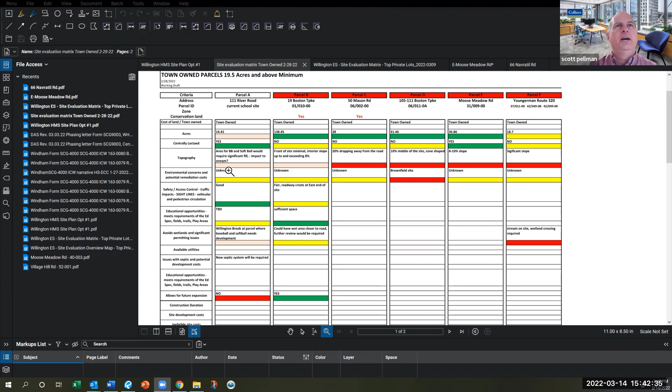So last meeting, what I've done since, in working with Phil, is I've taken a deeper dive on Parcel A. At this point we don't have a full ALTA/ACSM survey, anything really at exact scale that I can use, but I was able to interpolate off the town GIS sites. And so I've created the following concept for the existing Hall Memorial School site.

Again, just to orient yourself, this is Route 32. The existing fields are here. Actually there's a small building, I think a little storage building, right on the property lines. This existing parcel actually goes down quite a bit - again, don't really have the grading. There is also a stream in this location.

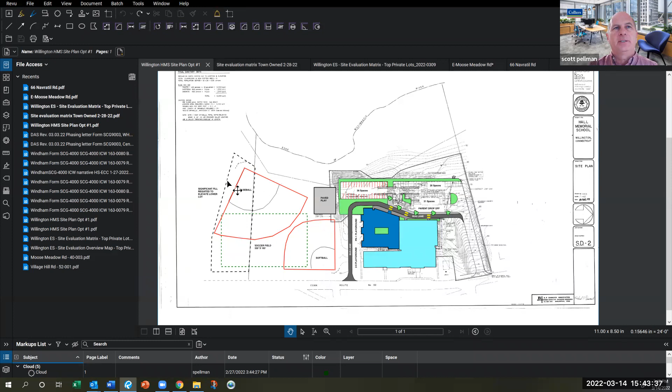So what I was able to do is look at bringing the overall grade of this field down a few feet, and then continued the grading down to within 100 feet of the stream, which we understand is typically the normal wetland setback. So I offset 100 feet from the stream, did some calculations on topo, then was able to set this line off the GIS map, bring it into this map, put it to scale - since this is an older drawing from when the addition was created - to get the site plan into scale.

So the thought here, from a circulation standpoint, to start out, is to create a new curb cut off Route 32 specifically for bus access, separating the bus from the parent drop-off, which we think is critical to help improve traffic flow. So we'd have a bus lane here, right up adjacent to the school, a dedicated bus lane, then a plaza area here separating what is the current parent drop-off. That would function very similar to how it functions now. You've got a much wider lane here for the parents to pull over to this curb line. The way we typically organize these is we put a nice ornamental fence or gate.

So there's specific control points in this, again, concept plan - this is just a concept to test the site. What you'd do is have openings within those gates at specific points to come across and enter into the existing building, which could be controlled to make sure you maintain the safety of the students.

We've proposed putting additional overflow parking onto what is right now currently the paved play area, picking up an additional 36 spots there. So with the revisions, I believe we're at 93 spaces. What Phil was looking to get was actually 100 plus 12 visitors, so 112. Right now this represents 93, so we're close, not quite there.

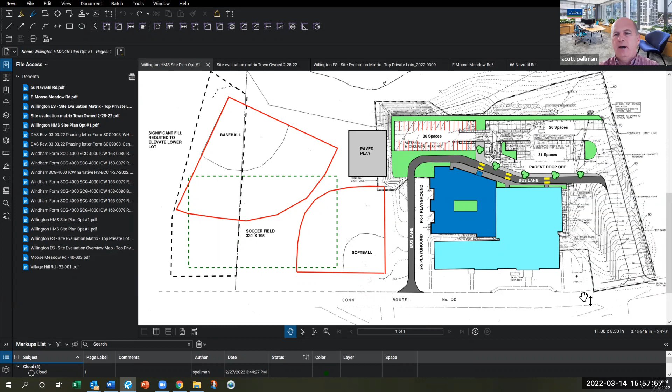Scott, the 112 spaces that Phil's looking for seems to fly in the face of what's in the state guidelines for recommended number of spaces. Well, he did a staff count as well as support, kitchen staff, janitorial staff, and then added 12 spaces.

Paras, office staff - he based his number on a physical staff count for a combined school. But that question would be better posed to Phil. The numbers I was coming up with when I look at those guidelines is somewhere around 50 to 60 spaces for a middle school, and that would not cover the staff required to run the school. How is DAS going to view that?

I'm not sure which document you're referencing, Ralph. Connecticut School Construction Standards and Guidelines, September 22, 2016. Is that the Excel spreadsheet? No, sir. That's a PDF file.

Not to throw the state under the bridge, but they fixed some of it. They had a recommended stage size for a high school for a long period of time at 600 square feet, which is not even a full classroom. Now if you try to put a lot of high school choral or instrumental programs onto that stage, they're not going to fit.

So you got to be careful on what you look at. The state is not going to argue required spaces, specifically when Phil's basing it on actual staffing to run the school - that would not be a problem. Typically we're going to have to look at local zoning requirements too. Usually they don't really address schools, so you have to try to equate it to some other retail functions when having discussions with planning departments regarding parking for schools.

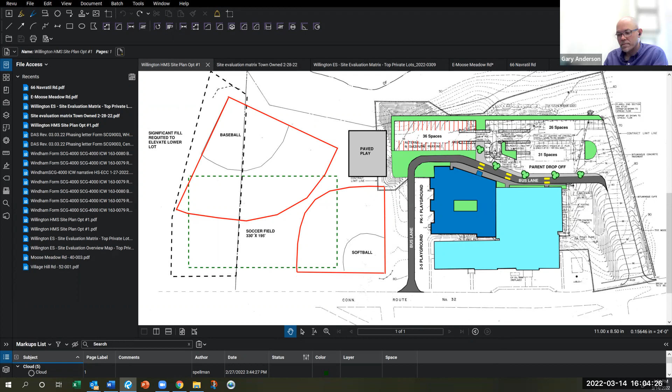I would like to make a motion that we go into executive session, inviting Mr. Levitas and Mr. Pellman, per Connecticut General Statutes 1-200 subsection 6 and subsection D. Can I get a second? Second. All right, I guess Gary, Ralph, and I are the voting members here, so raise your hand if you vote in the affirmative to go into executive session. All right, that's a unanimous vote to go into executive session.

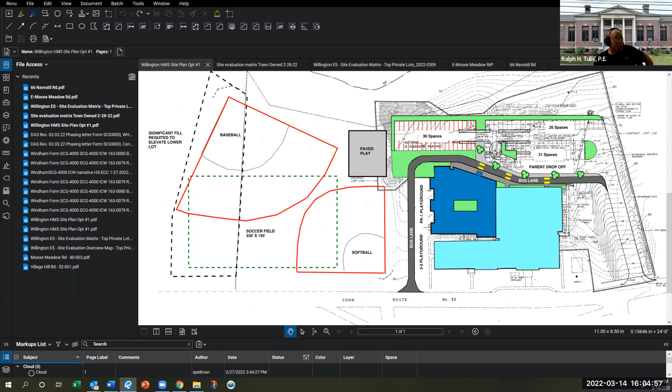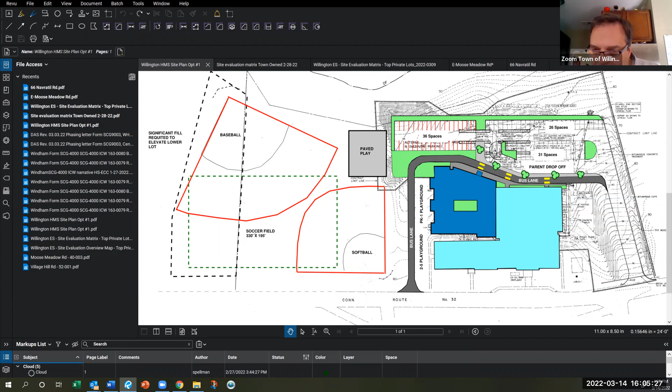Okay, since there's no one else in the meeting, I don't have to kick anybody out. Have you stopped recording? I'm just expanding my screen so I can get to the record button here, and I feel like there's a way I can lock the meeting. Should be. Opening up all the little... all right, lock meeting. Okay.

Okay, we are returning from executive session at 4:21 PM, and I'm unlocking the meeting now in case there's anyone in the public who wants to join. Okay, we're back in regular session.

Hang on, let me get my agenda. Next item on the agenda is recommendations to the full committee, if required.

I believe that we would like to recommend to the full committee that we should be doing the outreach soon to anyone in town who would like to have property considered, even possibly as a donation.

I think we don't really need a motion, that could just be consensus to recommend that back to the regular committee. Yeah, I would just communicate that under our report. Okay, I'm just going to make a note so I remember to do it.